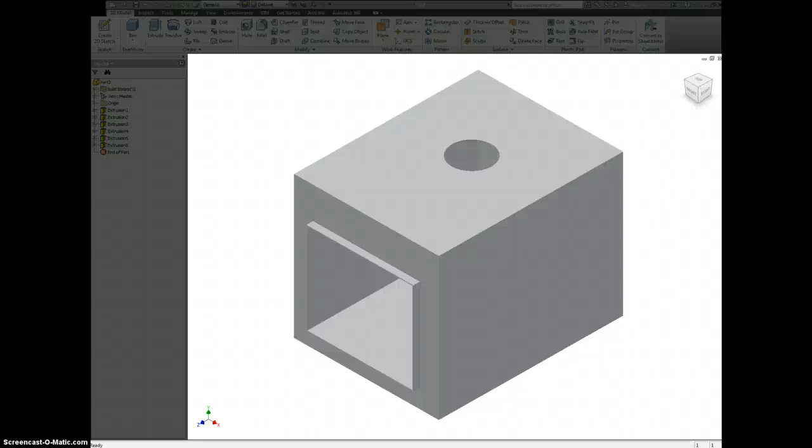In the last video I mentioned that with this lip we may come back and make some modifications to it later. Now that I'm looking back at the drawing for it, it says it's supposed to be a quarter inch thick metal, not the 1/8 inch we're using for everything else, and the lip sticks out 1.5 inches instead of 1 inch. So let's make those changes.

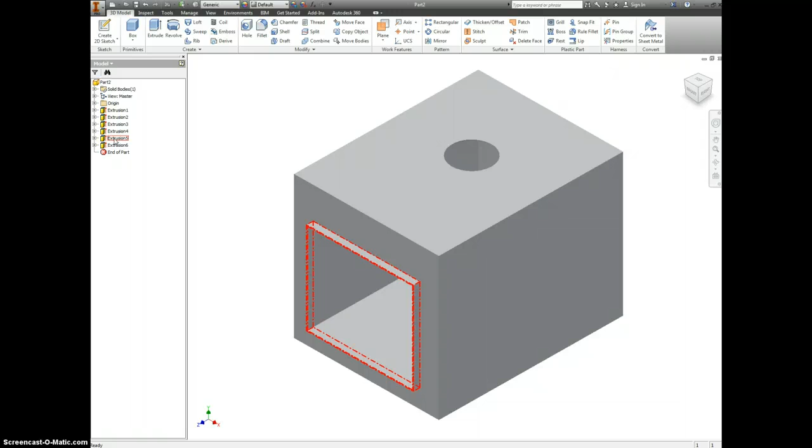If you move your mouse over the top of the browser bar, the feature will highlight once you get to it. So let's change the thickness of the metal first. Change this 0.125 to just 0.25.

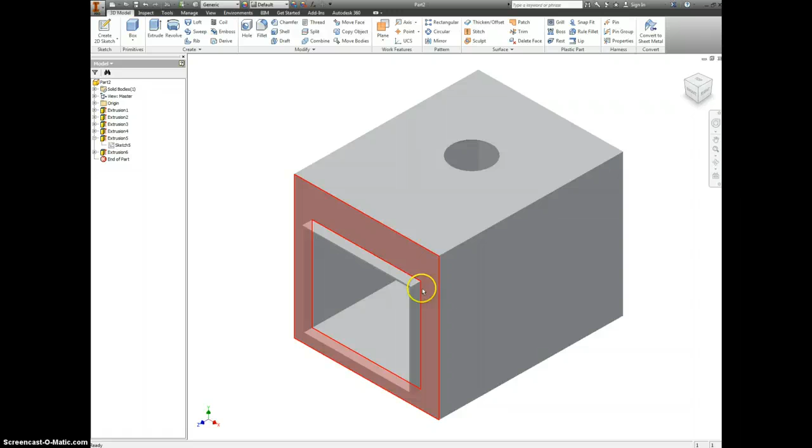Finish your sketch and double click the extrusion next. Make this 1.5 inches here or here and hit enter. So now that sticks out the right distance. Good, now we're caught up.

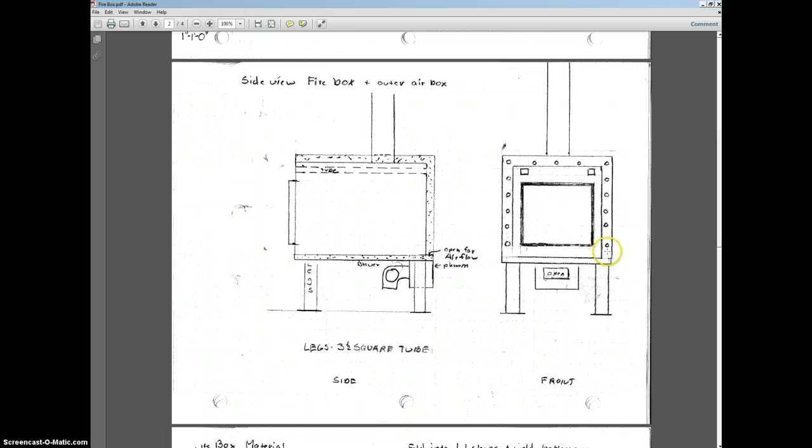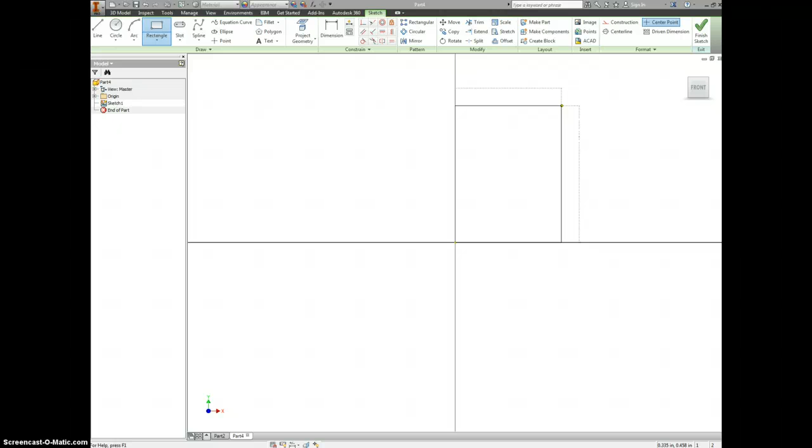So let's make a new part file. Just like before, right click, 2-point rectangle, start here. I need to check my directions. It is 26, let's click back on here, 26 by 26.

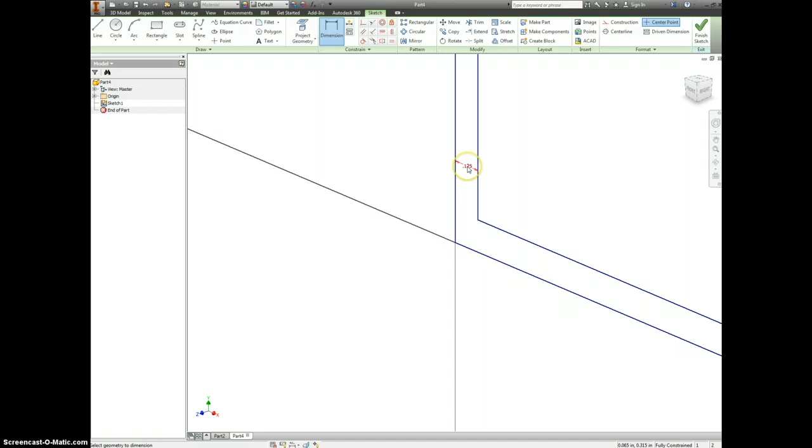The metal is 1/8 inch thick. Oop, let's cancel that for a second. So let's offset this - I mentioned the space in between is 0.125. And then this is actually going to be 30 inches long. Something didn't go right, 30 inches long. Enter, okay, let's look at the back side of it.

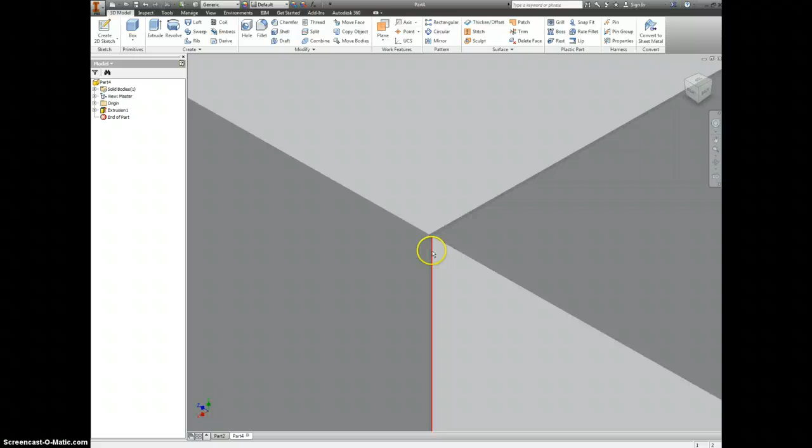Same as before, let's make a new sketch here. Let's finish our sketch and extrude just this part, 0.125 in, so it's flush.

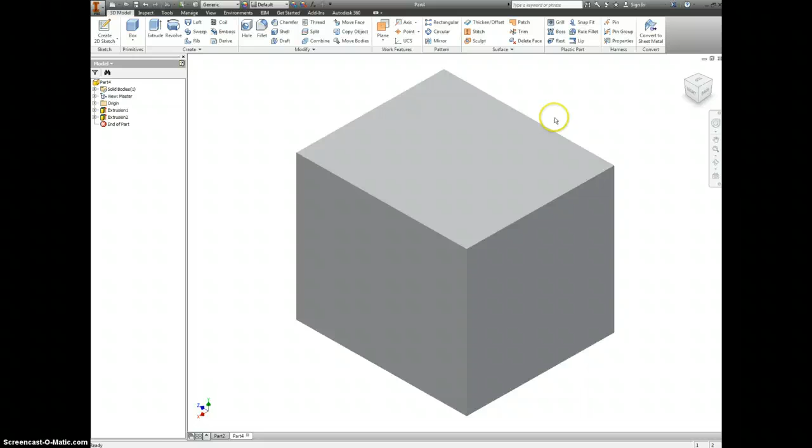Okay, so now we have this big hollow empty box, and that's looking pretty good. We may go ahead and put in the hole for this opening here, so we have like a little fan, basically - they call it a squirrel cage. It's just a little fan that spins around to circulate the air in here, to draw air in and help force it out.

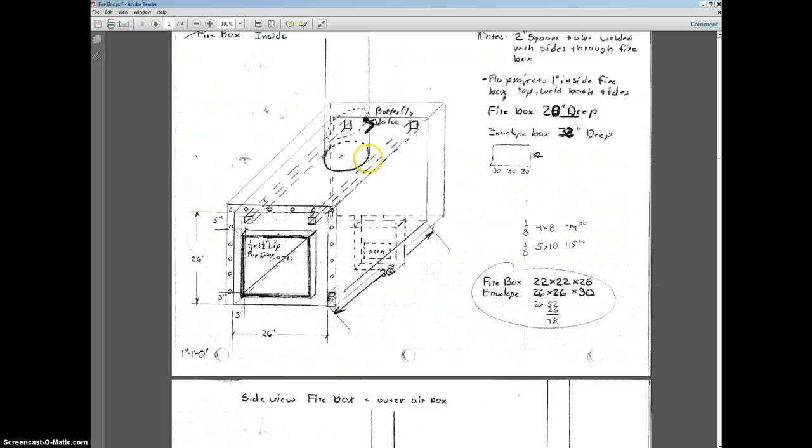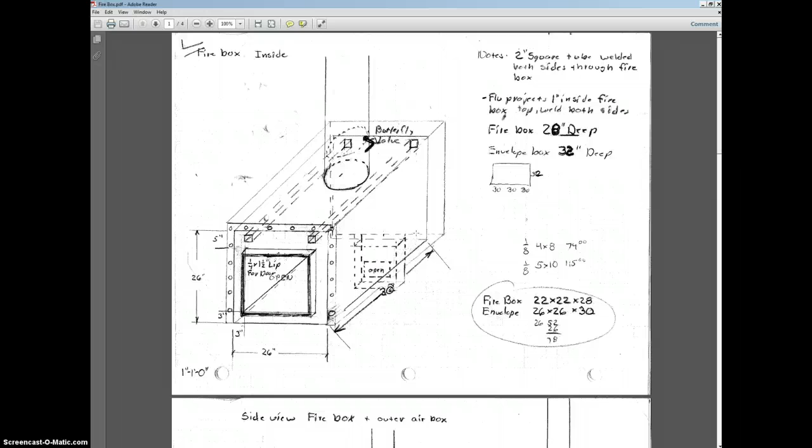There's the blower, so you get a little better idea of what it looks like. I don't know if I have on here what he was thinking for it - I don't see it. But I do have extra notes that noted it, so I'll just go to those instead.

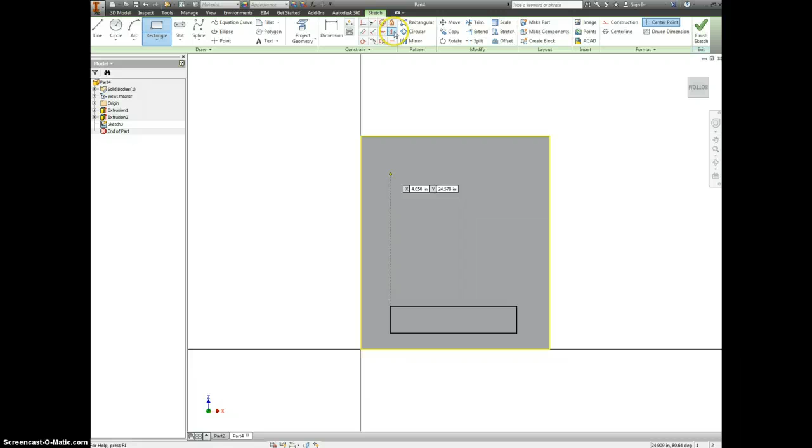Let's look at the bottom side of all this. Make a new sketch, we're going to make a rectangle. If you use a vertical constraint, you can grab one of these midpoints and line up the midpoints so that if I were to stretch these sides out, they'd adjust symmetrically. This is going to be about 4 inches wide. We want at least an inch here.

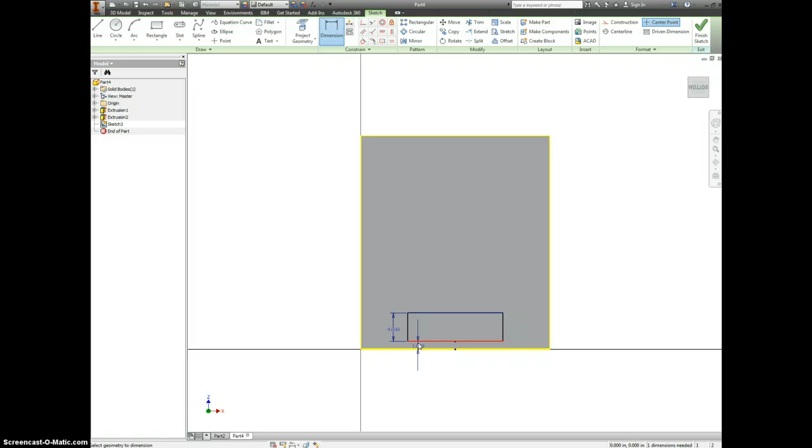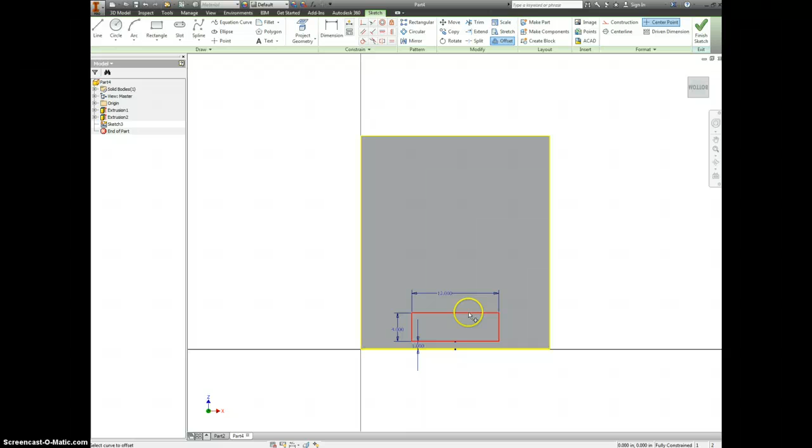And let's make this a foot wide. We're also going to offset in, make this 0.125 for the thickness of the metal, and let's extrude this out. Let's go 0.75.

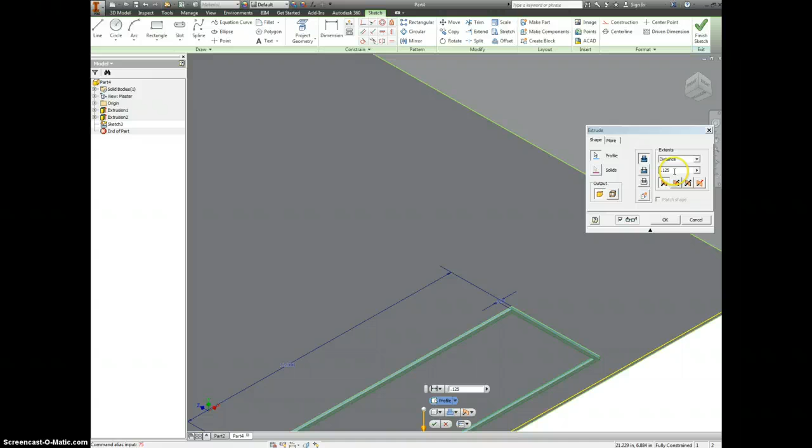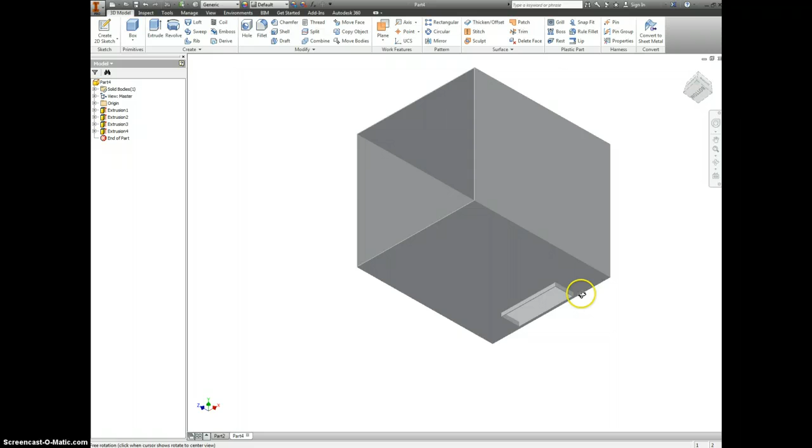Alright, make a new sketch here. Finish that sketch. Make a new cutout, we're taking off 0.125. And now we have a hole in the bottom of the box. Good.

And for now, this will be good enough for our envelope.